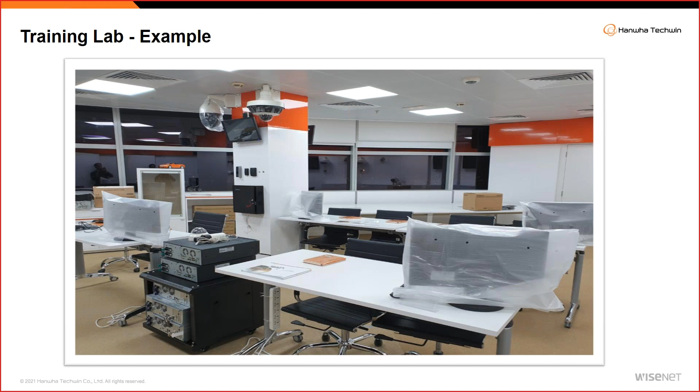They will study the product, configure the product, understand the product, go through certain challenges. So that helps them deliver a quality handover for you. All right, next is...

Okay, let's have a quick look at this video. It's about product quality.

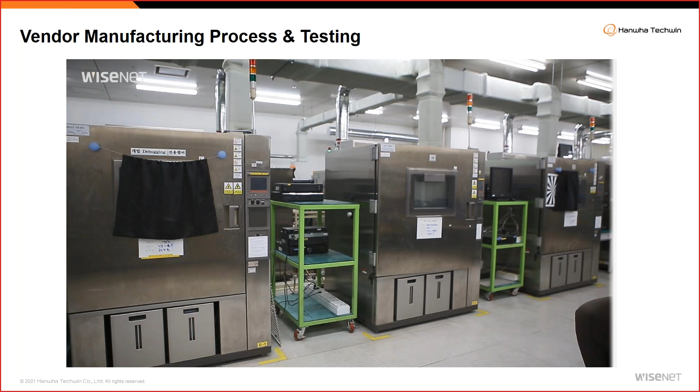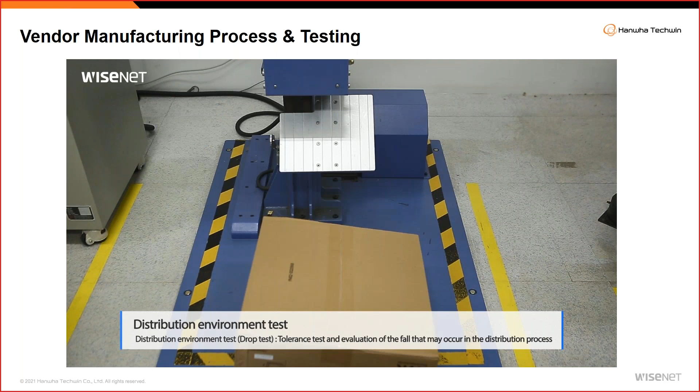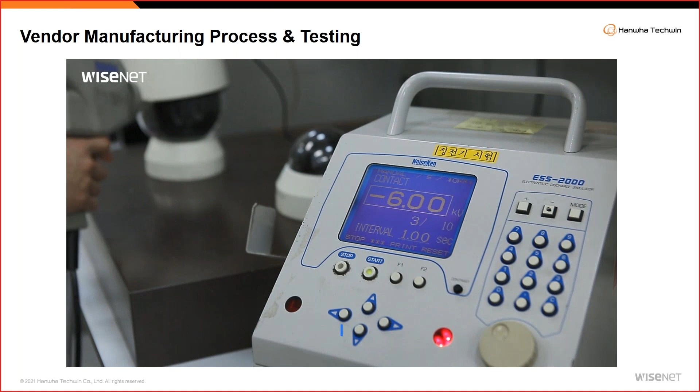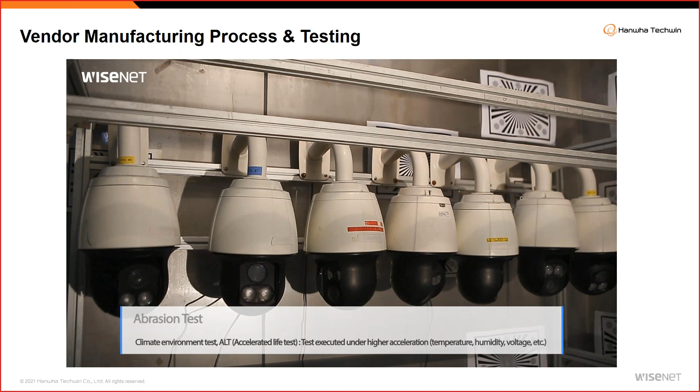So here we can see the products are going through multiple testing: vibration testing during transportation, drop testing, surge protection testing, temperature testing, humidity testing.

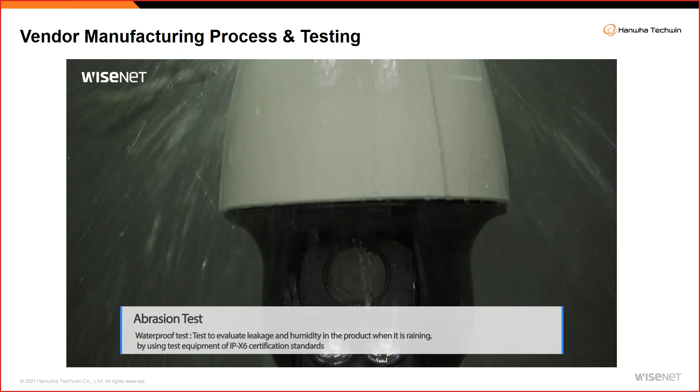Image reproduction, image quality, water protection testing - so all these are different testing processes that the vendor does for the product. So you have a fair idea of how every product goes through this kind of testing. Okay, so who does this testing? If someone else is doing it, like an OEM or some other vendor who's supplying to five or six companies just changing their name, it may not be unique technology.

I mean it may not be a vendor-driven product, right? So if a vendor is having its own manufacturing plant, its own R&D center, testing center, you will see there is a very vast difference in the actual physical product when you implement it.

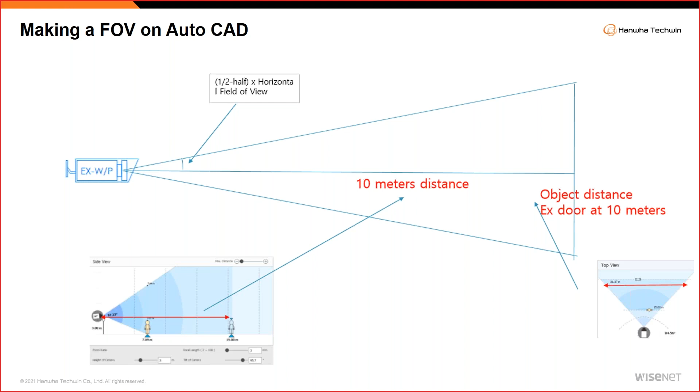How to draw this? We have tools, many tools available, free and paid. Many vendors are providing tools now. Let me take an example of our tool and also a third party tool.

Our website is Hanwha Security. If you just type in Google Hanwha Security, I think we'll finish after this topic and cover the rest tomorrow. Go to the website, the global website, the first one, and click on toolbox. You see the toolbox on the right side?

If it is in Korean language, you can change to English, not a problem. Click on Toolbox Plus, then go to Network Camera on the left.

You can take any camera, start with a box camera. Take any camera, and there is an option here called Field of View, FOV. Click it, now it gives you an idea.

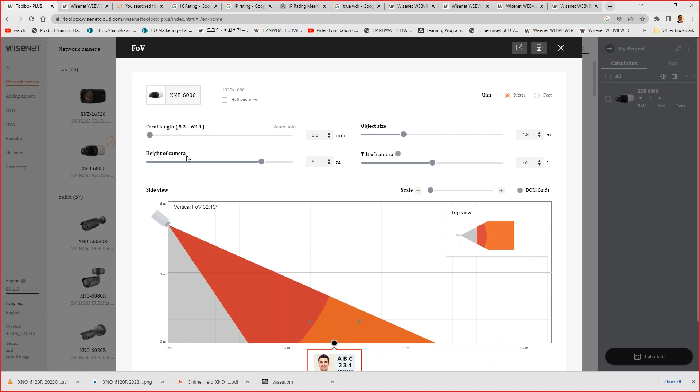If I move the camera with 3 meter height, and the person is at 15 meters, what can I get? I can get 146 pixels. According to the DORI guide, 146 is not identification, it is recognition.

If you need identification, I need more zoom lens, at least 14 or 15 mm. I can get 300 pixels identification at 15 meters. So this is how you get a basic idea.

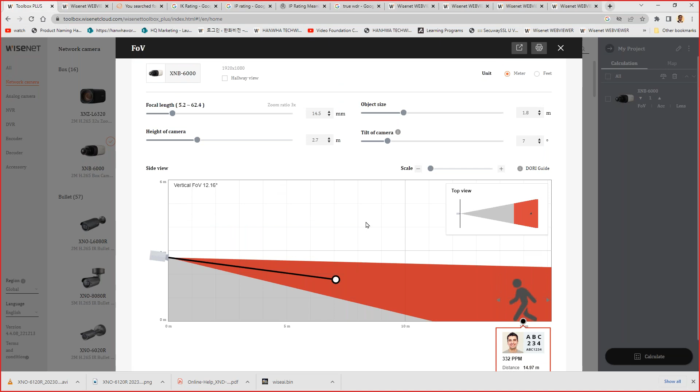How to draw in AutoCAD? You have to go to AutoCAD top view, not side view. So when you put top view, you have to draw a camera first, then draw a 15-meter line.

Let me take another pen. Let me take here. You first put a block, draw a camera, draw a 15-meter line, and then it tells you the...

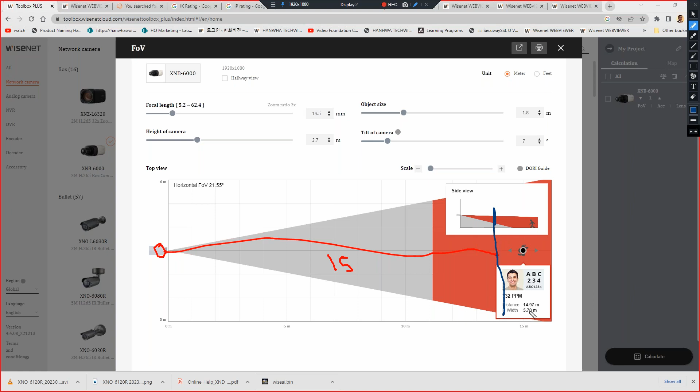The horizontal width is 5.7. That means from 15 meters, from the center, 5.7 — you have two options. You can divide by two, so about 2 point something, and draw here with a different color: 2.7, 2.7, which should come to around 5.7. So whatever you do, divide 5.7 by 2 and draw half here, half down, and make the cone.

That is one option. The other option: you see here horizontal field of view is 21 degrees. So you again draw the 15-meter line at 21 degrees, draw here 10.5, 10.5, draw the angle and cut. This is how you get the field of view.

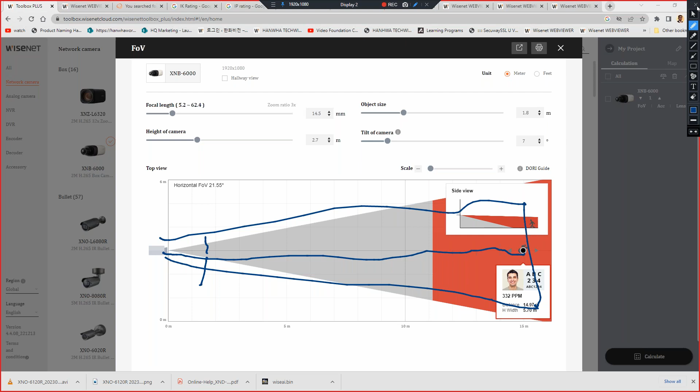If you want, you can also put AutoCAD drawings, or there's an option here called map. This is not part of the quiz, just for information. You can upload a map. Let me take...

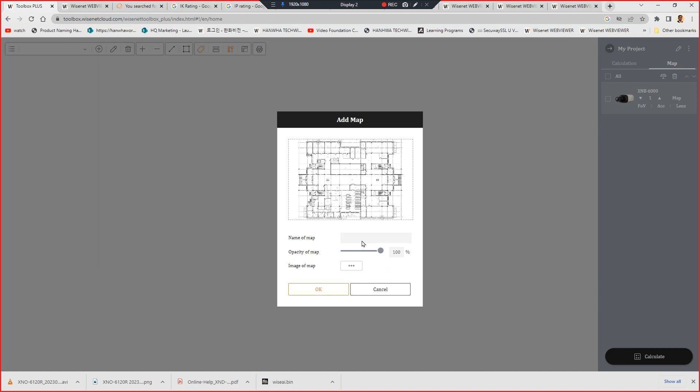Desktop, demo floor, first floor. You have to calibrate — just ask the person what is the width of the door, roughly 1 meter. You calibrate the map for 1 meter. Done, so the map is calibrated.

Now you can drag and drop the camera, rotate the view, and check.

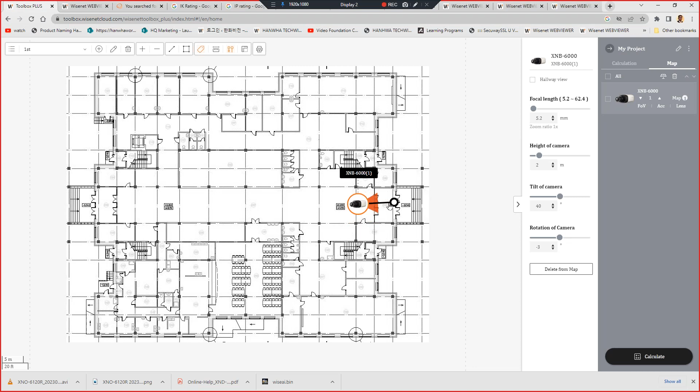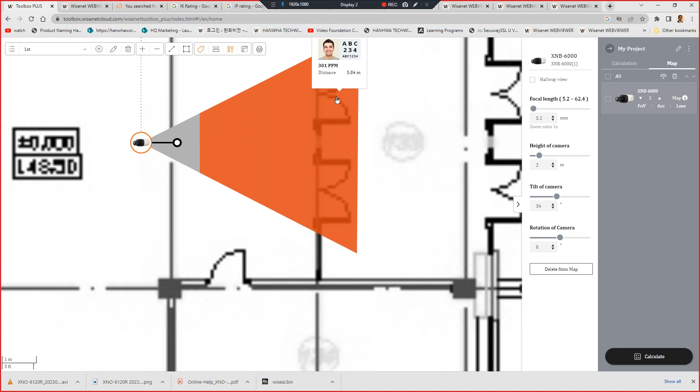In the camera web page, you can also measure pixels. If I go to the camera at 192.56, how do you check this on the field? I can take this box icon and measure my door here, 900 pixels, because I'm so zoomed in. I can get 900 pixels, so I can get strong identification if a person is coming through the door. That's 900 pixels for 1 meter, so pixel per meter is 900 pixels per meter. So you got the idea.

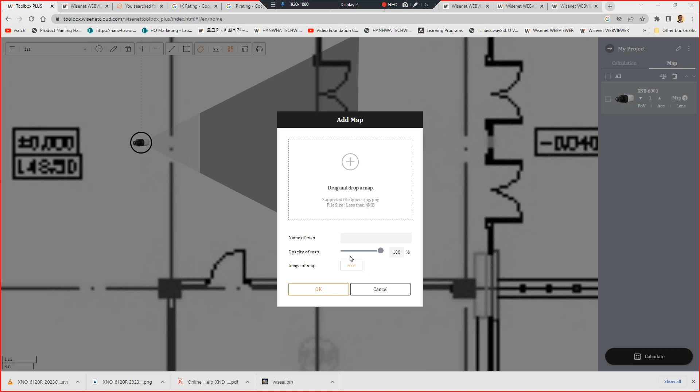Now, the third-party tool, I think we can see later. For today, I think this should be enough. This particular tool only accepts image files. So if I want to add one more floor, it's image file only, yes. So you have to convert it to an image file.

Questions not related to today's topic we cannot cover today. For example, HTTP comes under the networking and cybersecurity section, we'll cover that during that time. But is it okay if the camera is... no, it is not okay. HTTPS is secure, so it should be there. So is it okay if the camera only has HTTP? The camera should have both options for sure, HTTP and HTTPS.

Next question: can you briefly explain recording on SD card and NVR? This is for very special projects. The camera will record on the SD card, and in parallel it will be recording on the NVR. If for some reason the NVR is disconnected, there's a chance the recording stops for that time. Maybe the NVR is running fine, but the switch disconnected, or maybe the cable disconnected. So in that time, you still have a backup recording on the SD card. That is the benefit of using cameras with SD card recording, but it's very expensive because you have to buy an SD card for each camera, and you have to give two power supplies - one Cat 6 PoE power, and you have to give external power also.

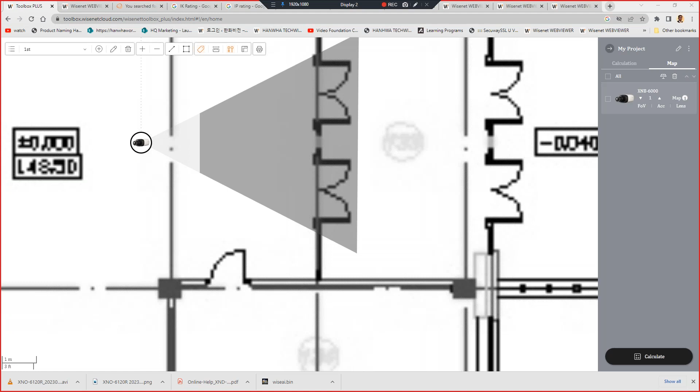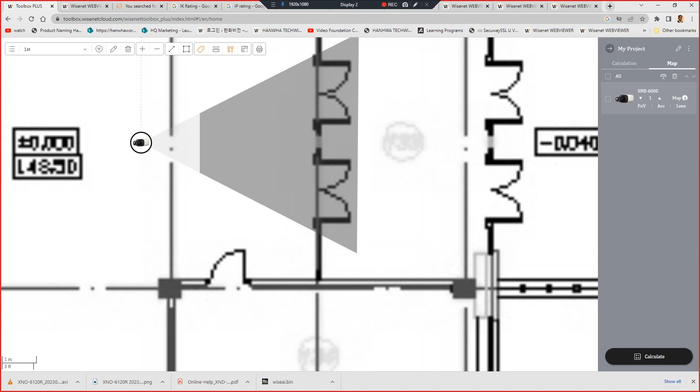Another question: there is nothing called an identification camera, there is nothing called a recognition camera, there is nothing called a detection camera. Any camera which has the right lens and resolution can do identification or recognition. It purely depends on the lens, sensor, and resolution. Sensor matters a little, but mainly resolution and lens are very important - that's what gives you that view. So it can be our camera brand or any camera brand; if you have the specific lens and the resolution, you will get a certain view.

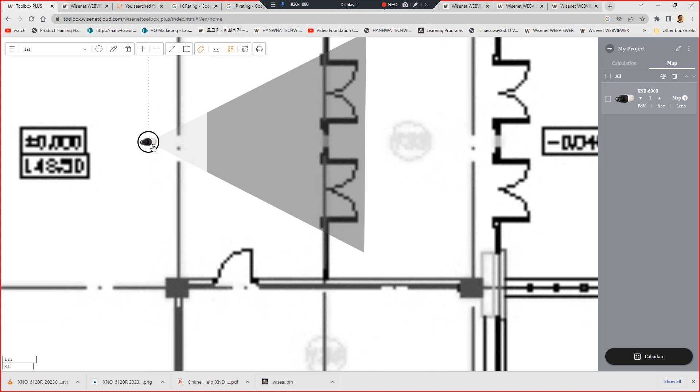That's why some cameras are specially called identification cameras - because true WDR is required. You have to make sure true WDR is there. Many brands still don't have true WDR series; they call it 120 dB, but it's not true WDR. That's why you still have to use the word true WDR, and they simply call them identification cameras. Another reason identification cameras are special is because they have more lens options - this guy maybe 5 to 50 lens, so special lenses are available, or you will use special lenses in this area. So ideally speaking, if the door is only 2-3 meters away from the camera, any basic camera with a 3 to 10 lens can do identification.